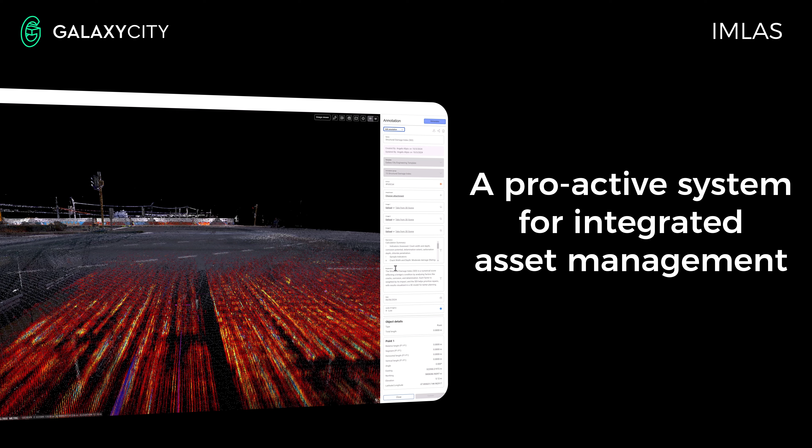In collaboration with international partners, we've developed a solution to address these issues: the Integrated Multi-Layered Analysis System, also known as IMLAS. IMLAS future-proofs your assets by helping you assess their condition, identify weak points and establish a proactive repair timeline before failure occurs. It digitises your asset data above ground, on ground, in concrete and underground, enabling virtual walkthroughs and seamless communication between all stakeholders. The system also works alongside existing systems, captures historical data for detailed reporting and ongoing asset management.

We are now ready to engage with our first large-scale infrastructure clients seeking to transform their asset lifecycle management. If you manage infrastructure such as bridges, dams, tunnels or mines and are ready for this evolution, reach out and start your journey with us.

My colleague Angelo will now walk you through the system and show how it has already benefited our clients. During this walkthrough, you will also meet some of our partners who have helped bring this system to life.

Hi, I'm Ruben Barnes, the Managing Director of PCTE. We have more than 15 years experience as Australia's expert supplier of test equipment for construction and also industrial purposes. These are tools that reveal what is below the surface, and that's why we are proud to work with Galaxy City. As the local rep for Screening Eagle Technologies, we put customers in the front row for new developments in subsurface scanning and condition assessment for the built world.

For Galaxy City's IMLAS system, this is the ground penetrating radar scanners, which will locate and map buried cables, pipes and services in the ground and the network of steel reinforcement inside of concrete. The full picture above and below ground secures condition assessment tools like the Schmidt hammer for compressive strength of materials and the Profometer for corrosion's half cell potential surveys. The risk of damaging steel can also be ascertained.

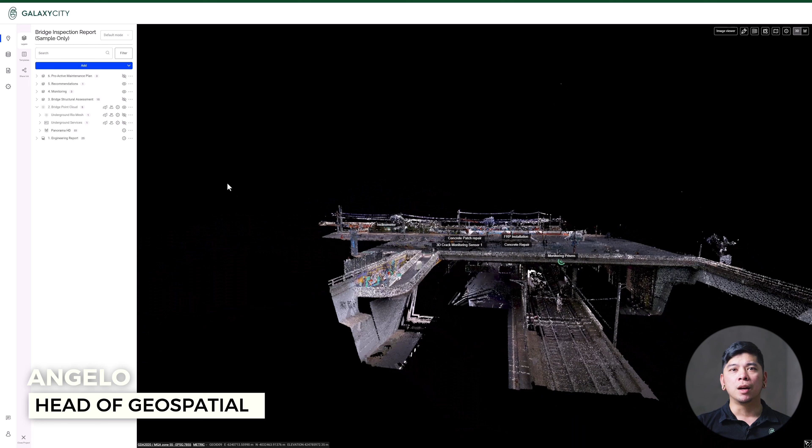With IMLAS, we take different data sets from different platforms, companies and reporting methodologies into a single source website, making it easily accessible for everyone that's involved in the project. You can access this data anywhere in the world as long as you have an internet connection.

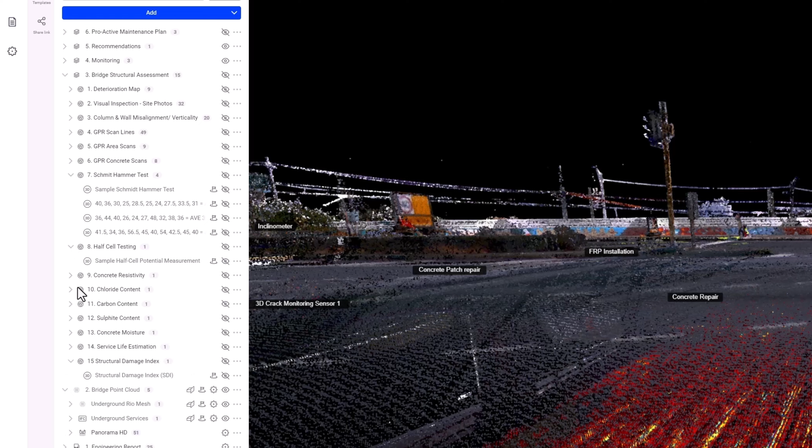For example, here are some of the methods and engineering tests we use to ensure the comprehensive understanding of the asset's condition. With all of these results, we can easily determine the service life estimation of varying components and in turn the structural damage index of the asset.

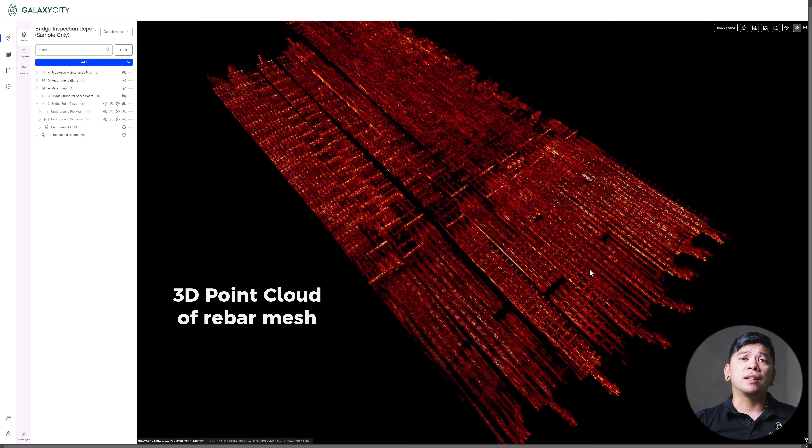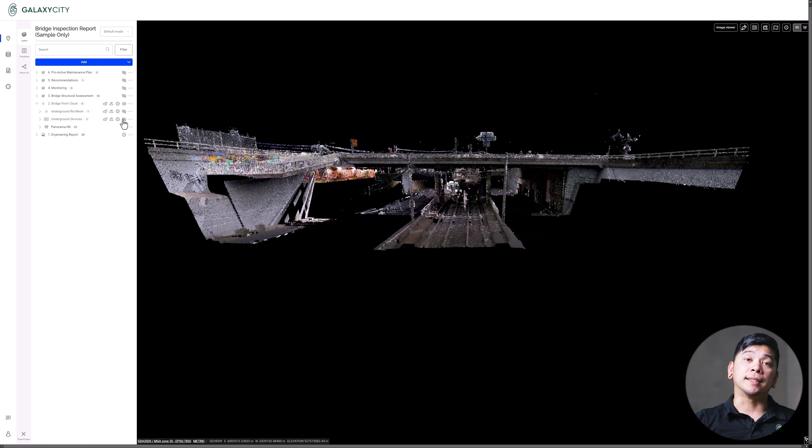Another example of integrating other formats is the underground services that can be imported as an IFC, completing the digitization of your asset. I hope you enjoyed this demonstration.

What Angelo has shown is just a glimpse of the current capabilities of IMLAS. Our open source approach ensures that the system is flexible and adaptable to your organization's specific needs. IMLAS can scale in the areas that matter most to you, improving asset health, reducing unplanned downtime, enhancing oversight, and ultimately saving you both time and money. So what are you waiting for? Let's revolutionize the way your assets are managed.